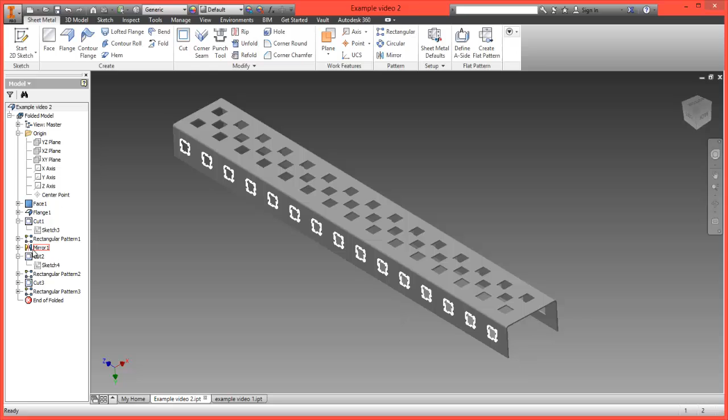So for example, on testing this component I realized that the holes on the side were absolutely perfect, but the holes on this top surface were wrong. And actually these holes, left and right of that center pattern, were not close enough to the edge. They were too close together. So I'm going to find the sketch and edit this sketch. So by expanding that cut on the left hand side, I'm going to find the sketch, edit it.

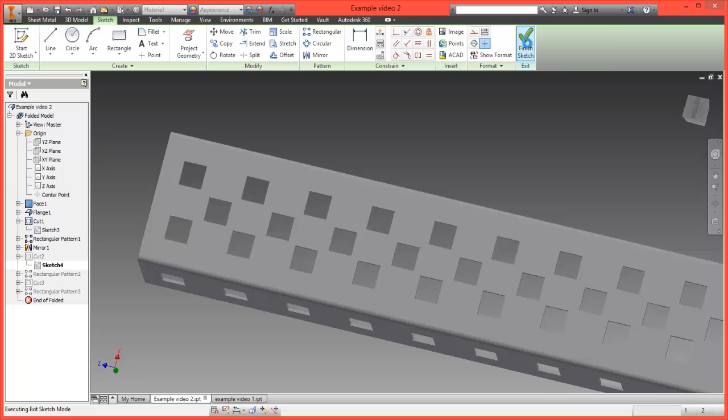What I think is the mistake is that I think these need to be 3mm instead. So I'm going to go into each of these, double click, change them to 3mm, and then finish the sketch, and you'll see that the whole component updates straight away. And if I now roll around to that surface, that's looking much more like a realistic hole spacing.

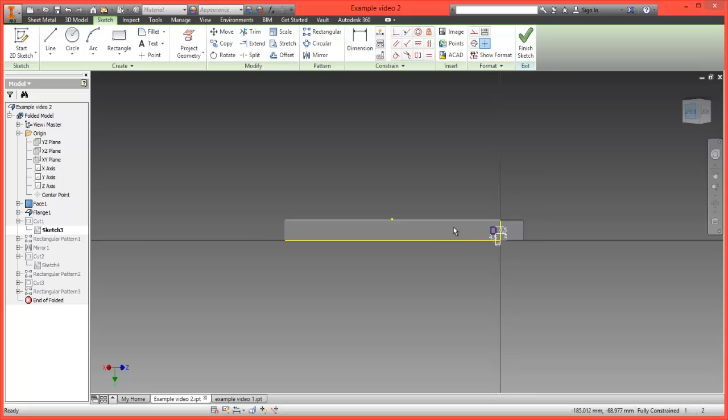What I'm also going to do is go back into that first sketch that I created, edit this sketch, because one of the features that I didn't create on the very first one was the actual little round on the corners there, and it's actually quite a nice feature of the VEX components that each hole and each end and each edge has been nicely finished. So to give my components really that feel and that look, I'm going to add that in.

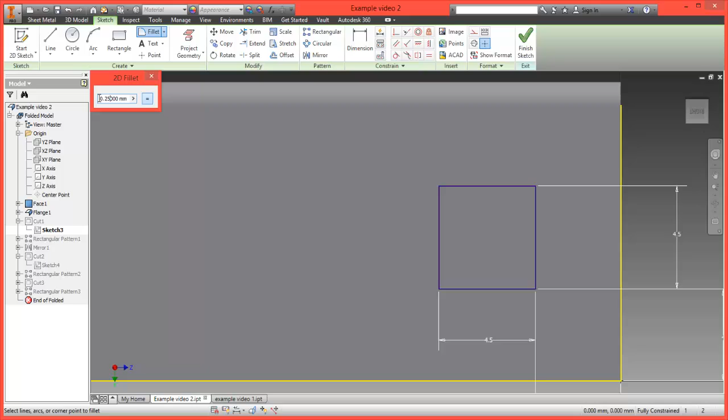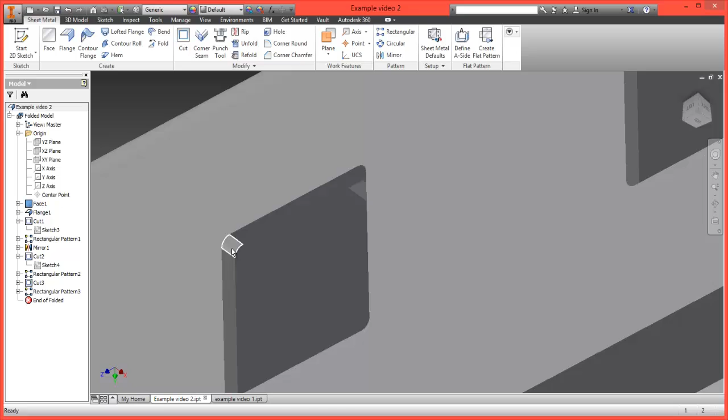Now I'm going to add in a round of 0.25mm. I think that's going to feel about right, and I'm going to click on these corners. And all I'm going to do is just update that line work. I'm going to finish my sketch, and then I'm going to look in to those holes, and hopefully what I should see is that feature's now picked up, as you can see there. So I've now got my curves.

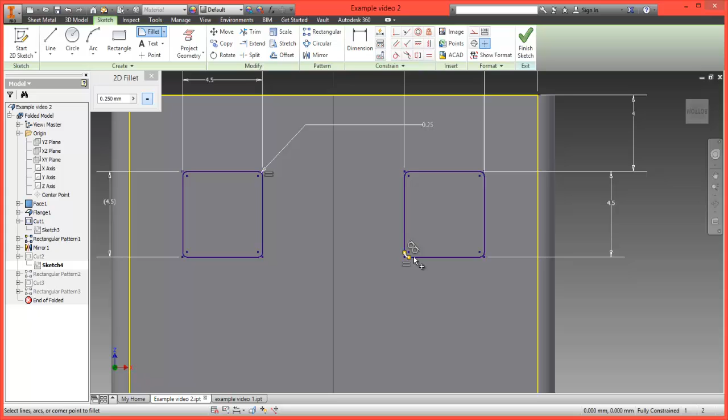I'm now just going to repeat the process very quickly on the other two sketches. So I'm going to edit this sketch, and again I'm going to go in with my fillet. It should come up automatically, and I'm going to fillet each of these corners. 1, 2, 3 and 4, and match it on the other side. And I'm going to finish that sketch to update those, and they've all gone in the pattern.

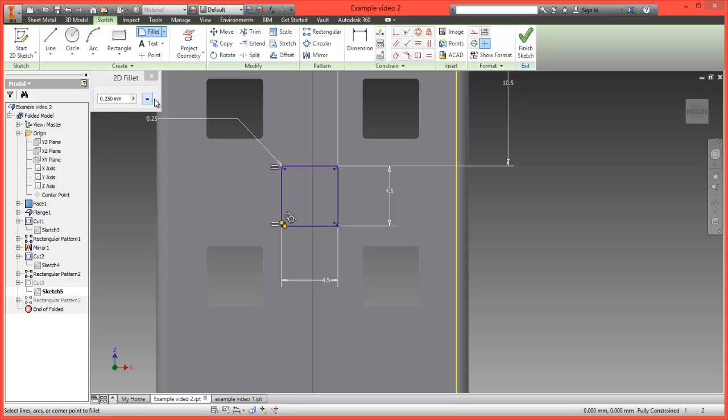And then the final cut that I created, again I'm going to repeat that. I'm just going to fillet that hole. Like so, and finish that sketch, and that should have all updated now. So that's starting to look a little bit more realistic.

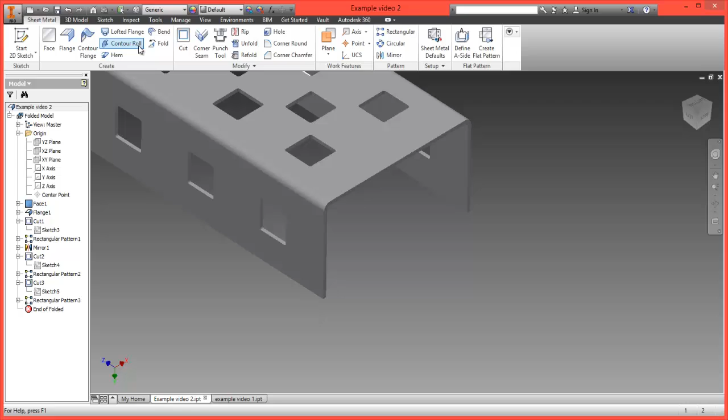The other thing I noted is that these corners here tend to have either a chamfer or a bit of a round on them, so I really want to recreate that finish. So what I'm going to do is look under my tools and see what options I have in terms of sheet metal to actually edit that component.

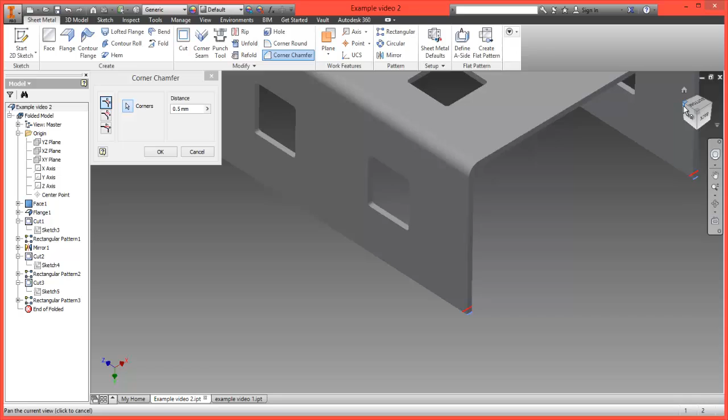Now I've got a corner chamfer tool here, and again if I just take a 0.5mm and scroll in and maybe choose one of these corners, that preview's looking pretty good. It looks like the kind of feature that I want to create. So I'm going to apply this to all 4 corners, select OK, and then I've recreated that matching chamfer just on that little corner edge there.

I can keep going now and add in the small pattern of holes down the side, the various different spacings for the holes, and I can really start to make this component not only my own but also to match some of the other VEX EDR components. Have a little play and see what you can do.